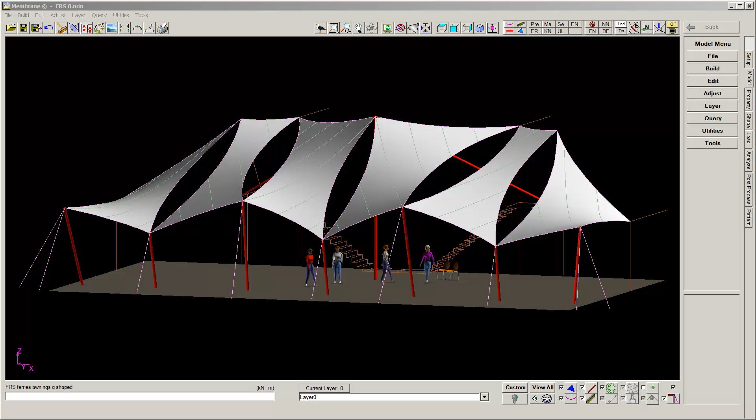In this video, we will show you how a tensile membrane structure is modeled and analyzed. We'll be using NDN membrane software, specifically designed for the engineering of tensile membrane structures. It's the same technology and software used for large projects such as the Millennium Dome in Greenwich, England, and BC Place Stadium in Vancouver, British Columbia.

Today we'll focus on a smaller but quite interesting project. This ferry ship, the Tanger Express, needs a structure to cover passengers on one of its decks. It needs to provide shade and weather protection, but also be attractive and resist the high winds it will be exposed to. The solution of choice is a membrane structure from Dolphin Tensile Awnings of the UK.

A tensile membrane structure is very different from a typical awning. In an ordinary awning, the fabric is flat and loose. When subjected to wind, it flutters and makes noise, and if the wind becomes too strong, the awning must be taken down. The tensile membrane structure is quite different: the fabric is pre-stressed tightly and has a unique double curvature shape. The combination of pre-stress and curvature makes it stable and strong.

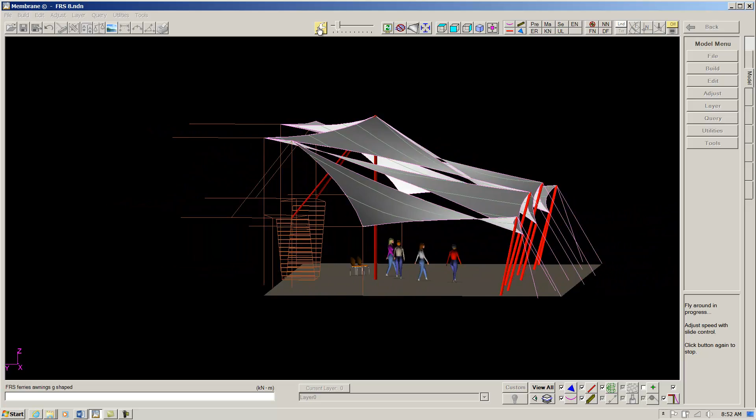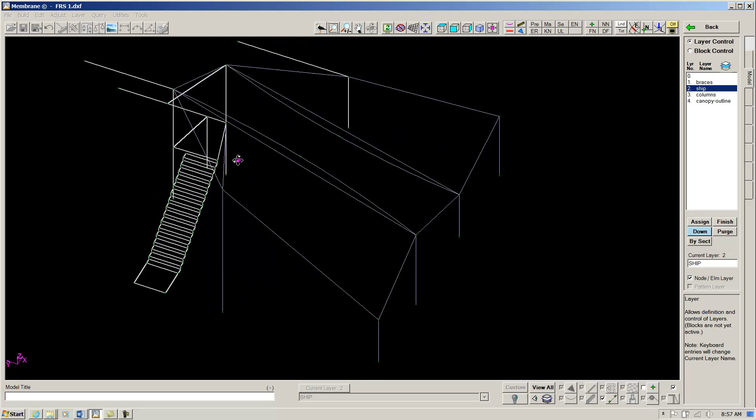Now let's see how this model will be built. The first thing we need to do is define some basic work line geometry. To save time today, we're going to simply read in a DXF file that contains this geometry. This is the geometry representing half of the structure. What's highlighted in white is part of the ship that's already existing, and this represents the outline of the canopy we're going to be building.

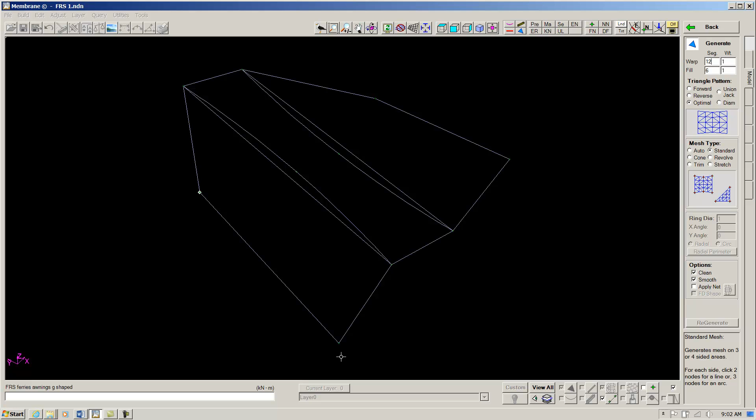The first step will be to generate the element mesh. We'll generate membrane elements, segments 12 by 6, and then we'll trace cables around the boundary.

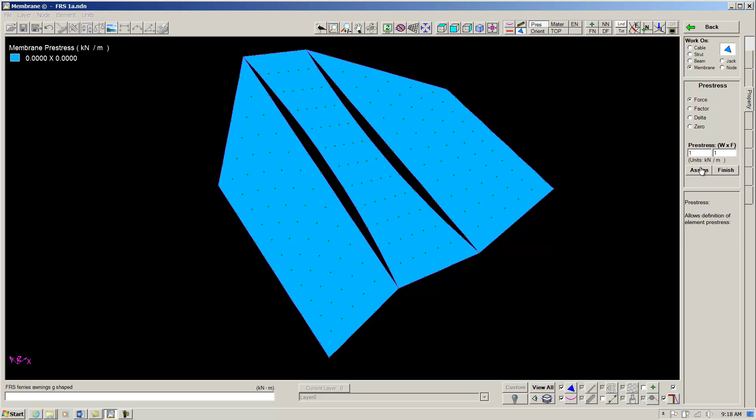Now we need to define our properties. We'll start with pre-stresses, defining a pre-stress force in the membrane of 1 kilonewton per meter in all directions. For the cables, we'll set a length sag ratio of 14:1 and let the software figure out the appropriate force in each cable.

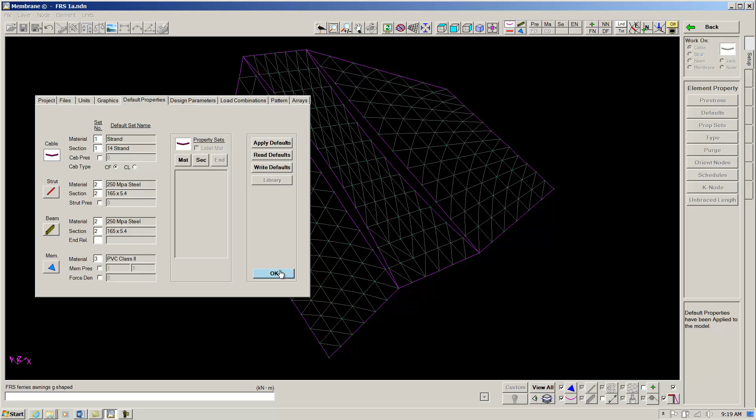Next we need to define material and section properties. I'll read in some default properties and apply them to the model. Now let me check over my data—we have pre-stress forces in the cables. We're using stainless steel structural strand, assuming 14 millimeter cable for now. The membrane has a pre-stress defined, PVC class 2, and that defines our warp orientation and the top versus the bottom.

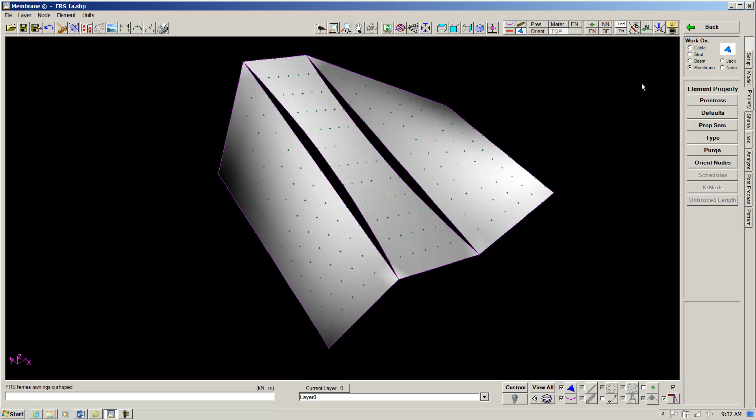Next we're going to do the form finding to produce the shape that's in equilibrium with the pre-stress forces we've just defined. This is a critical part of the design of a tensile membrane structure. We've now produced the shape that's in static equilibrium with the pre-stress forces. Notice the double curvature in the fabric—this is what keeps it stable under wind. The fabric already has a shape suitable to resist the pressures from the wind; it doesn't have to deflect and flutter like an ordinary awning would.

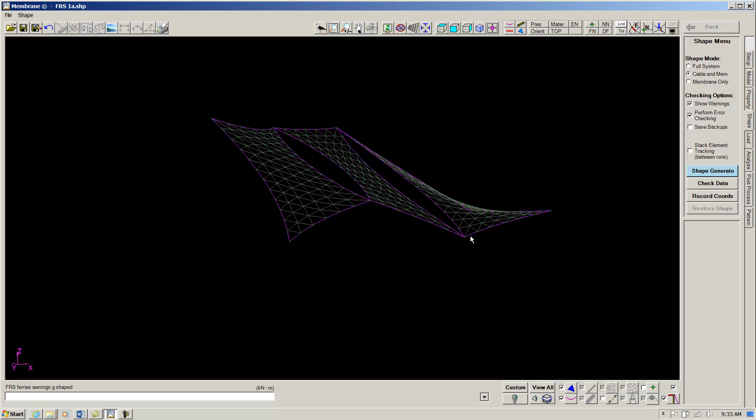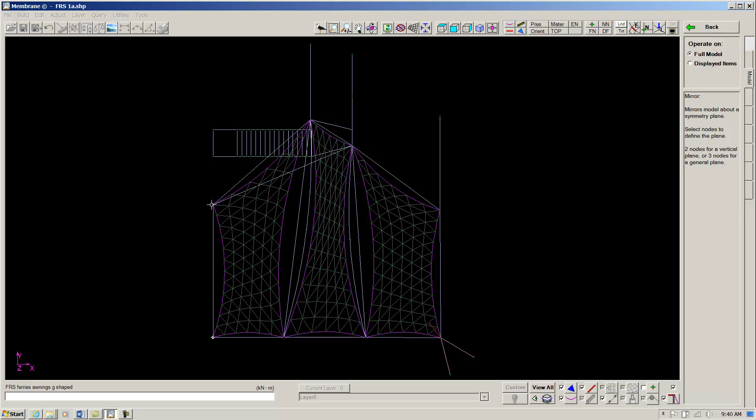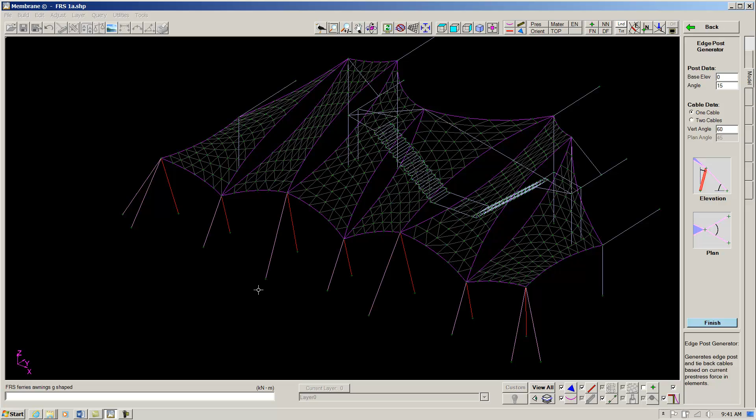Now that we've got the equilibrium shape of the membrane, let's add some framing around it. We'll go into our edge post generator and apply a post at the corner. At this point it would help to mirror this into a full model, and I'll delete away the work lines we no longer need. Back to the edge post generator, this time we'll use one cable. The unique thing about this edge post generator is it puts the post and the cable in the proper position so it's already in equilibrium with the forces.

The next step is to define our load cases. Load case 1 will represent pre-stress and dead load. Now let's define some wind load cases. We'll use a base design pressure of 0.584 kPa, equivalent to a 60-knot wind. We'll start by blowing the wind in this direction, and to account for the aerodynamics of the shape of the structure, we'll pull coefficients out of a building code library—in this case, ASCE 7-05.

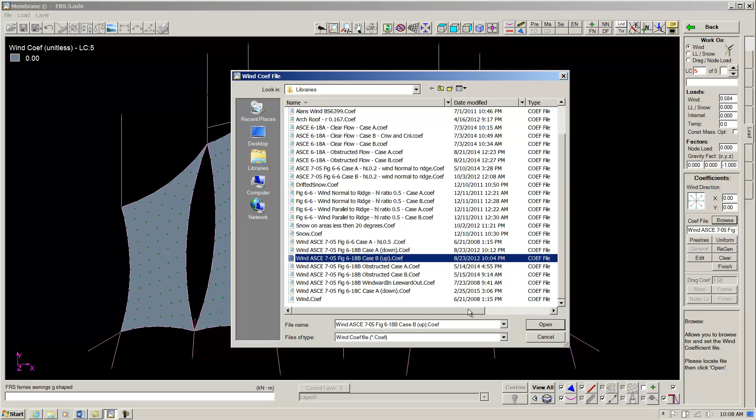These first few load cases will primarily be downward loads. We'll generate the coefficients, new load case, new wind direction, more coefficients. Now we'll use a different library that produces primarily uplift wind cases, with the same wind directions. Load case 8 will represent a live load case, using 0.25 kPa live load. Now we have our load cases defined.

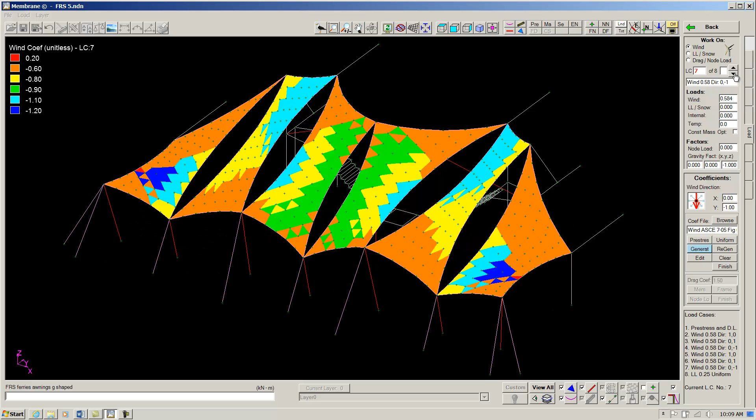The next step is to analyze the structure. Notice how the system deflects under each wind load case. It looks like all the load cases have converged, so let's go into the post-processor and look at the results.

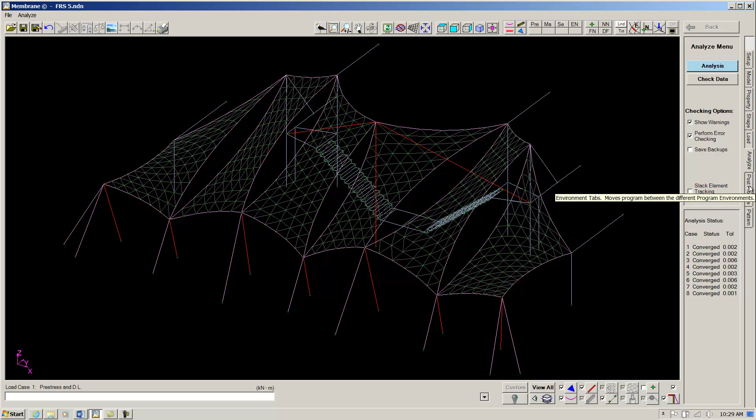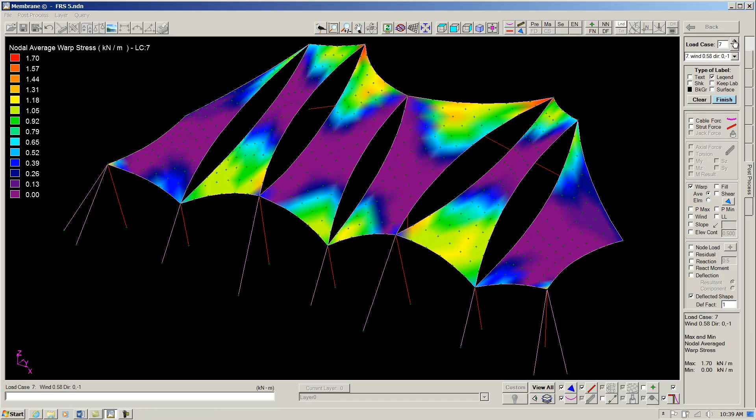In the post-processor, we can look at the results of our analysis—things like deflections under the various load cases, cable forces, fabric stresses. The other important thing we do in the post-processor is size our members. Remember, when we built the model, we assumed 14 millimeter stainless for the cables. Now let's see what size we really need based on the analysis.

Looks like some of the cables need to be a little bigger than 14, but most can be smaller. Now let's size the steel members—we use the British code, set our load factors, and size all the members. What we've learned is that the member sizes we need are really different than what we assumed when we started. So we should update our model with these new sizes and rerun the analysis, because we have different stiffnesses in the system.

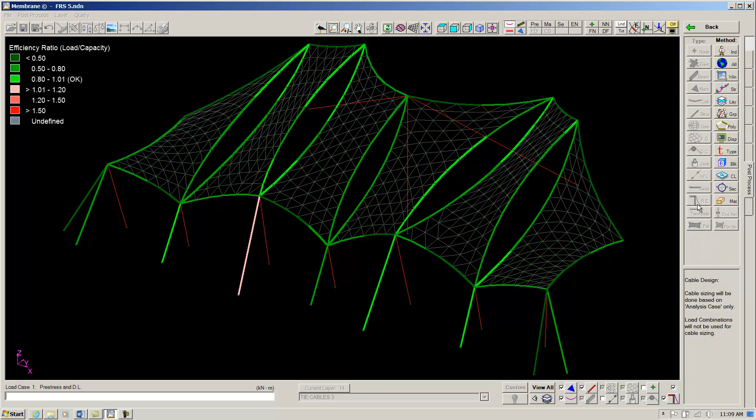As a final check, we go back into the post-processor and do a final check of our members. Everything checks out okay, except a couple of cables—so we'll size these two cables again, and they go up one size.

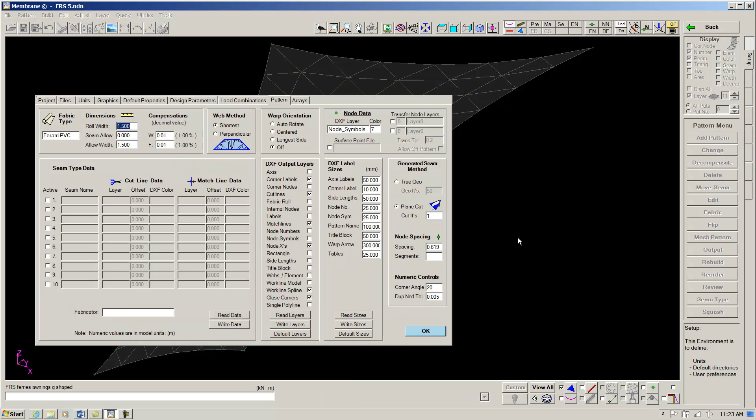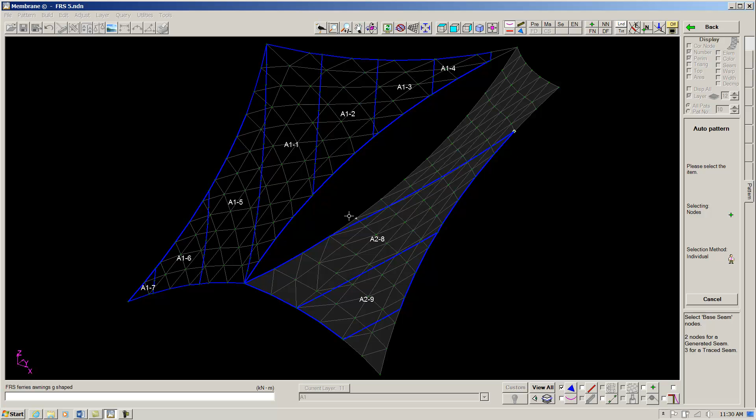Now let's pattern the structure. We'll go into the pattern environment, select the first area of fabric to pattern, and set our fabric width at 1.5 meters. We'll add a first seam in the middle and tell the software to pattern off in this direction. Same thing on the other side. The third panel.

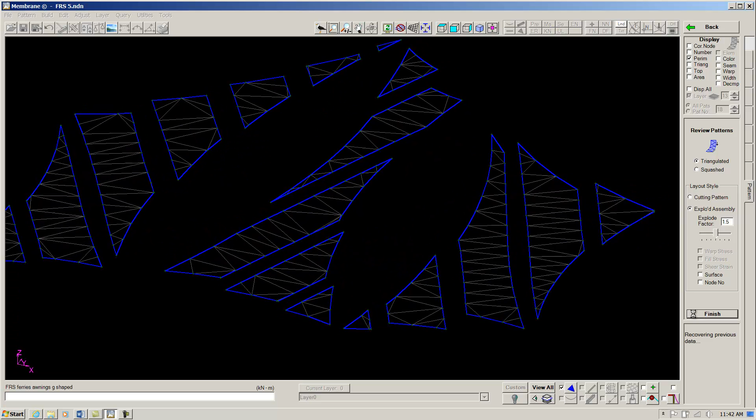We can review our patterns—this is cutting pattern style, and here they are in an exploded assembly. Next we write our output in the form of a DXF file suitable to read into a wide area cutter.